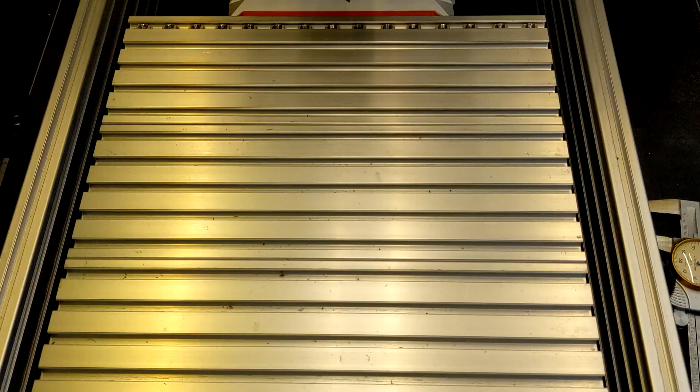The CNC router is almost ready to run. The aluminum profile work surface is for fixing the workpieces on the surface, but it still needs a spoil board.

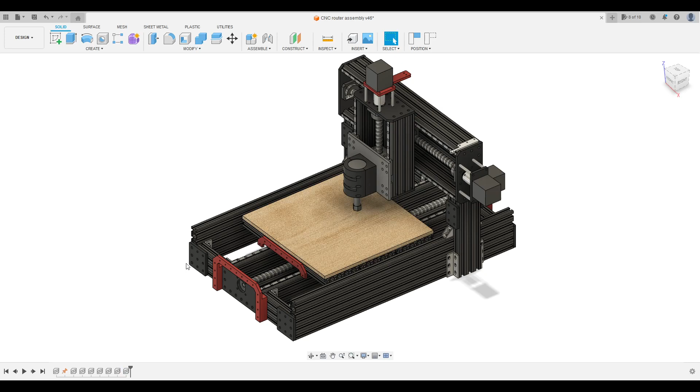The spoil board is a sacrificial surface that provides a relative parallel surface to the tools and prevents direct cuts on the aluminum surface. However, the boards need to be modified to make the underneath rails work properly. A pegboard type would be a good solution here. The usual material for a spoil board is MDF or LDF.

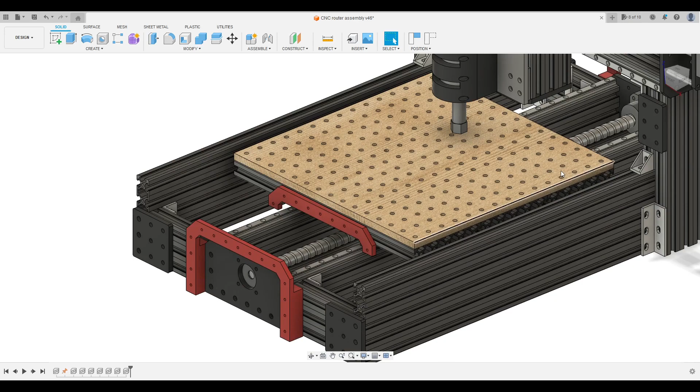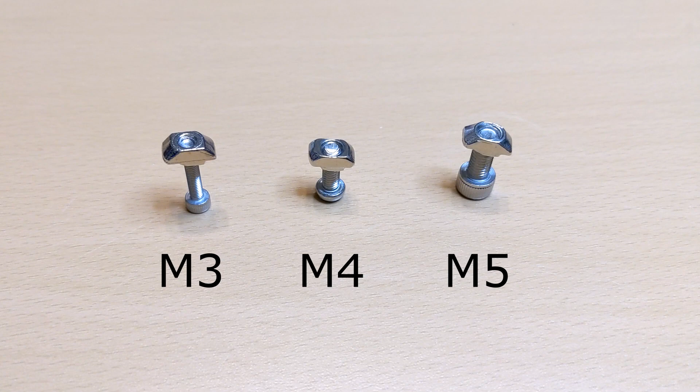I plan to drill a hole mesh on the spoil board and then fix it with the aluminum extrusion plane underneath with screws. There are 15 rails on the profiles, and M5 screws and T-nuts are the most applicable size for the 20 profiles that ensure a secure fixing. So the holes on the spoil board will be around 5 mm.

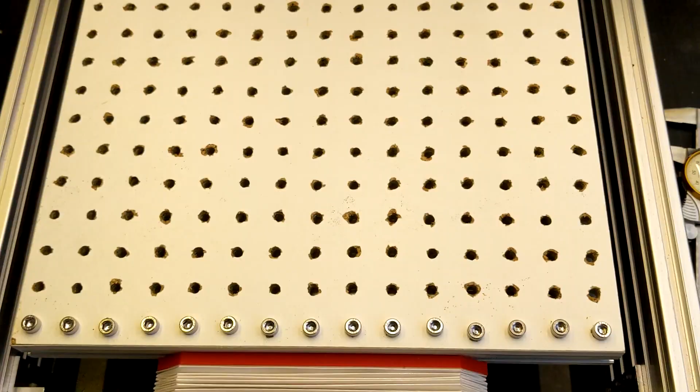Considering misalignment by hand drilling, I drilled the holes with a 5.2 mm drill instead of 5 mm. After drilling the mesh, attach the board to both ends along the y-axis. The remaining holes are for fixing and a cutting process. The spoil board features 195 holes for M3, M4 and M5 screws.

Before using the spoil board, it is important to flatten and align the surface to the router bit. So let's do some cuts with a flattening bit.

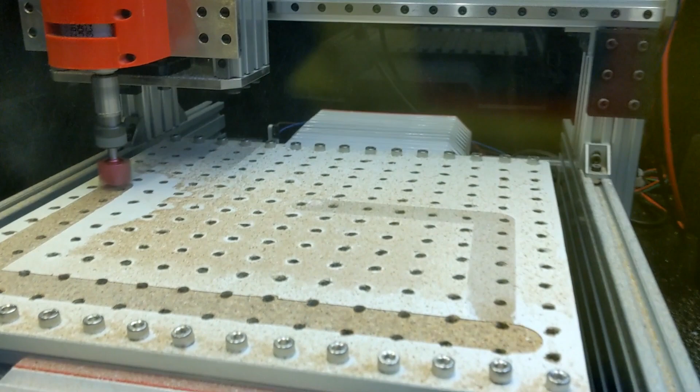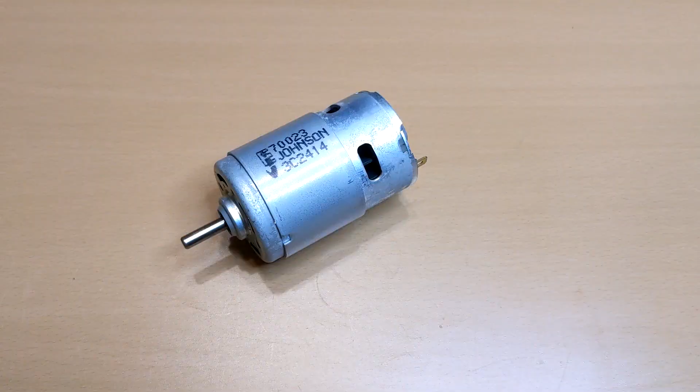During the first cutting process, I noticed the motor I purchased had an issue. The shaft moves axially, leading to various Z positions during cutting. Another problem I faced was the chuck. The first chuck I received was relatively loose on the motor shaft, and it usually needs to be installed with some pressure to secure it onto the motor shaft. A loose chuck can cause eccentric spinning during cutting, leading to unnecessary vibration.

After replacing both the motor and the chuck, cut an area on the spoil board to level the surface. Start from the highest point and gradually lower the spindle until the flattening bit levels the entire area.

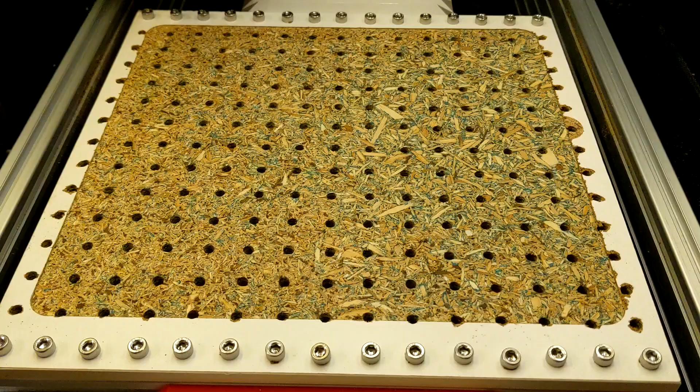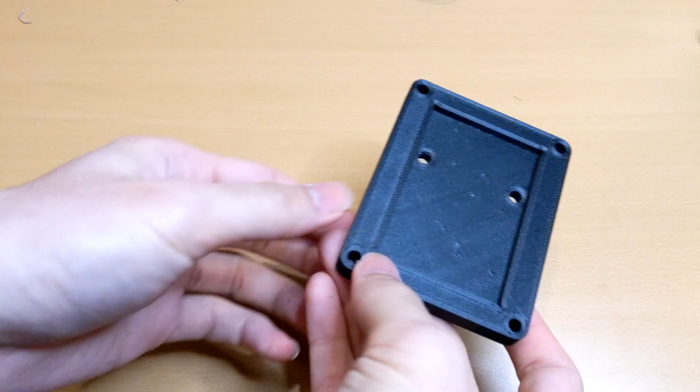The work surface is now ready for use. I can stick a part onto the surface and cut it directly. Additionally, I have the machine vise that I can use to clamp 3D printed parts for contouring their surfaces. I also 3D printed an adapter between the vise and the work surface.

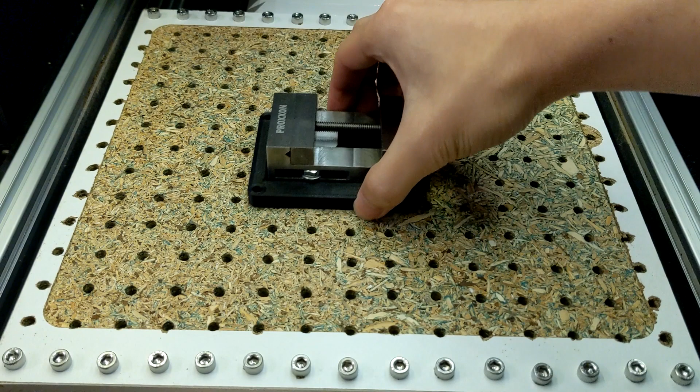This makes the edges of the vise serve as repeatable coordinates for processing G-code, making it easy to accurately align parts and manufacture them. This video is the spoil board setup for the CNC router.